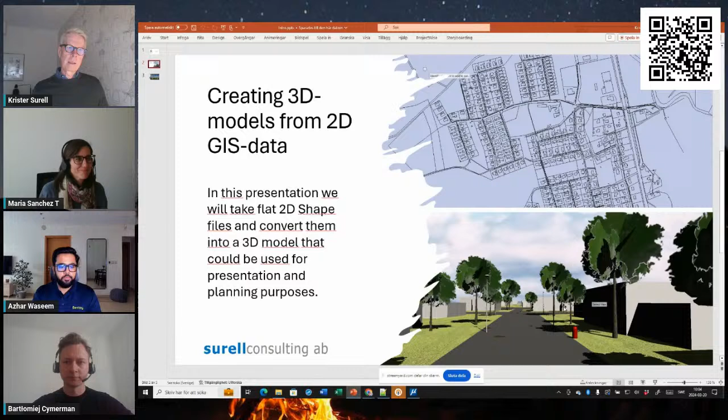So a couple of tricks to bring this flat 2D data into something much more interesting. And if we have a couple of minutes left at the end, we might also try to make it into something like this - from flat 2D data into something that looks really nice and you can use for different kinds of presentations. So let's move over to MicroStation.

So now we're in an empty file in MicroStation, and I'm going to start by bringing in some shape files. So I'll go to the attach tools, which bring in background data, and I will select a number of shape files that will constitute a base map. And these are geolocated, so I will reproject them to the current coordinate system in the file that I'm working in.

And if we just have a short look, we can see that you could actually bring in data in many other different formats as well, MapInfo for GIS or different 3D formats, SketchUp, 3D Studio, and so on.

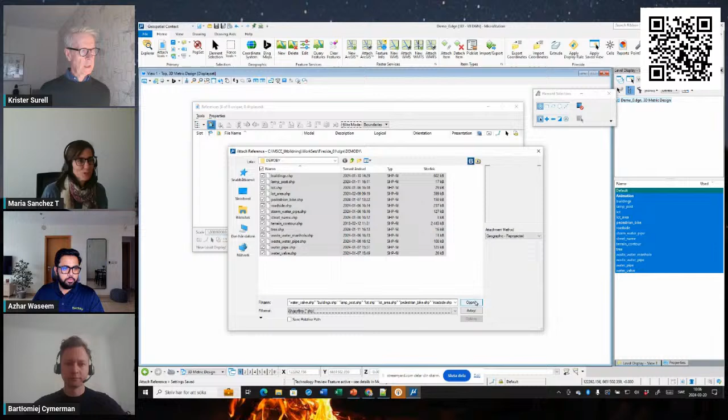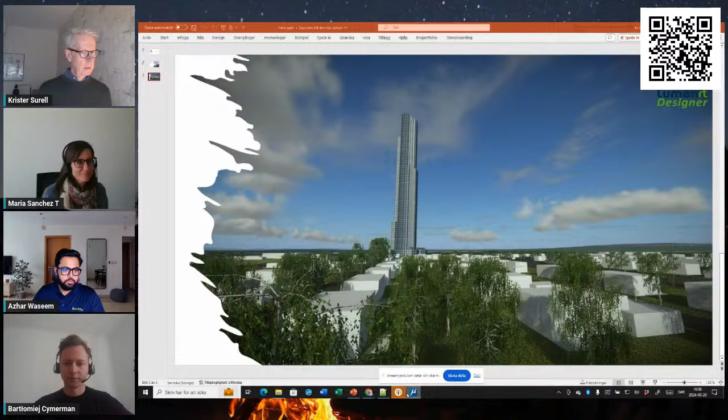But we will be working with shapefile for this. MicroStation supports more than 70 different formats, so yeah, it's great. So we bring in all the files. Since this is a live presentation, it takes a couple of seconds.

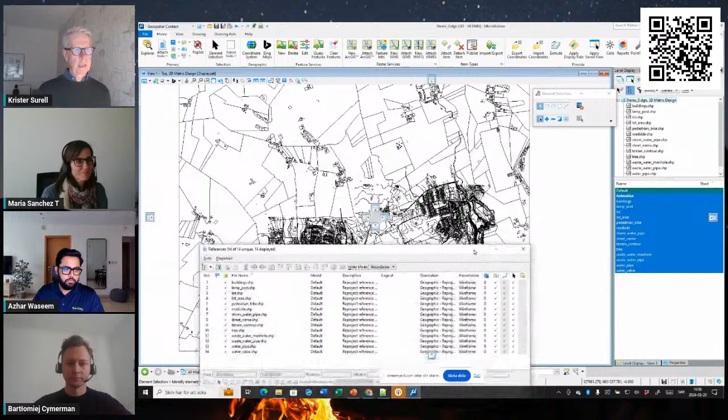So now we're here, and we brought in all the data into MicroStation. I will actually merge this into the current file because it will be a bit quicker when we do the presentation. Otherwise, we could have had them as references, and maybe the data would update and we'd see the actual live updates. But now we merge them into the file, so for this presentation, everything will be in the current file.

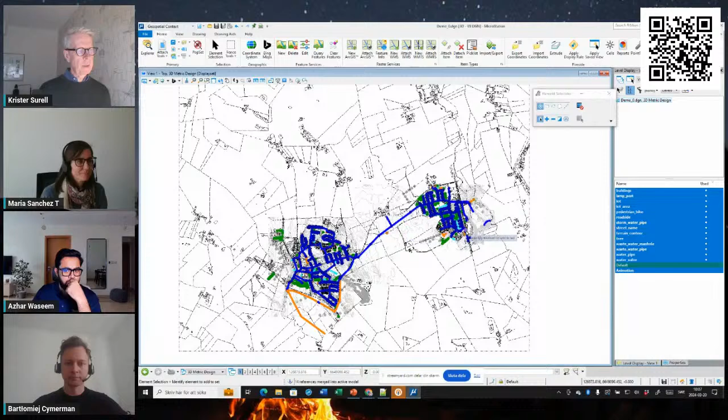Okay, so the data is now in the file. This is GIS data, so the data has attributes attached to them. If we zoom in and select the building, for example, that building will have data. This is Swedish data, so you won't be understanding so much, but anyway, you can see that it's actually attributes, and on the pipes, water pipes, there are also dimensions and materials and that kind of stuff attached.

I also said that this was geolocated, so let's see where we are. I will turn on an aerial Bing map in the background so we could actually see where we are, and we could see the building.

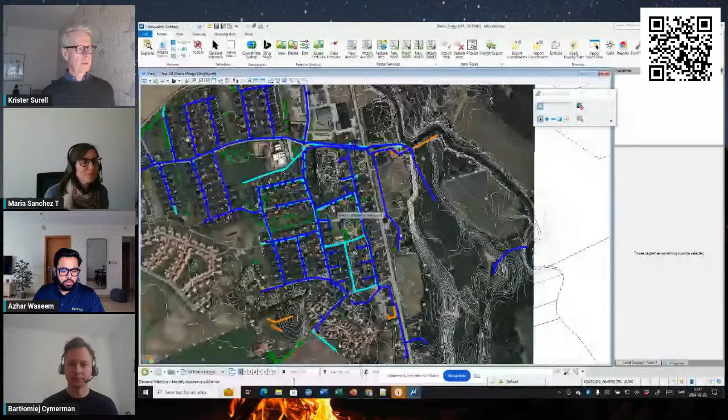This is also important about MicroStation 2023, that it has direct access to Bing maps and also to the Esri server, so with the GIS information.

So this is Sweden. Stockholm is around here, and we're a bit north of Stockholm for this purpose. So I will turn off the background map now that we know where we are.

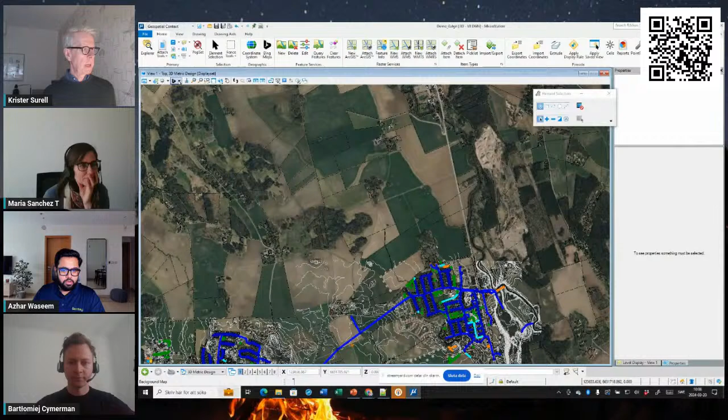And as you said, bringing files like we did here is one way to bring in data into MicroStation, but you could also bring in data from the web, from different Esri sources, raster sources, or vector data like feature services. I was trying to find a good data set to bring in here, but there wasn't very much because this is a very small city.

But there were actually some weather stations, so I could bring in web feature service data over weather stations. So I connect to a web server, and it responds and says what kind of data it has over this area, and those are active weather stations.

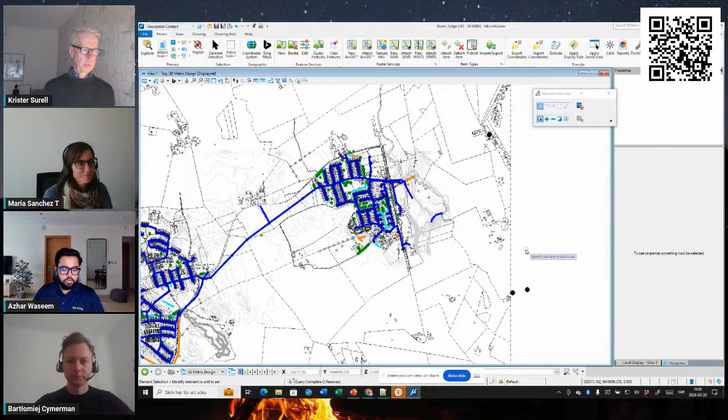So I could connect to this, and I could query, and it will read data over this area, the area we see in this view right now. So if I say query, you see it popped up a couple of sites here, and this could be shapes or lines or whatever. This was just an example of point data that we could bring in from other sources.

So right now we see this data in the way that I configured the layers to be, if we look at the colors and so on.

But another great thing about MicroStation is that you could choose how to display your data using the attributes of your elements. So I can re-symbolize this in many different ways for presentations and analyzing, using something called display rules. So right here we have something called display rules.

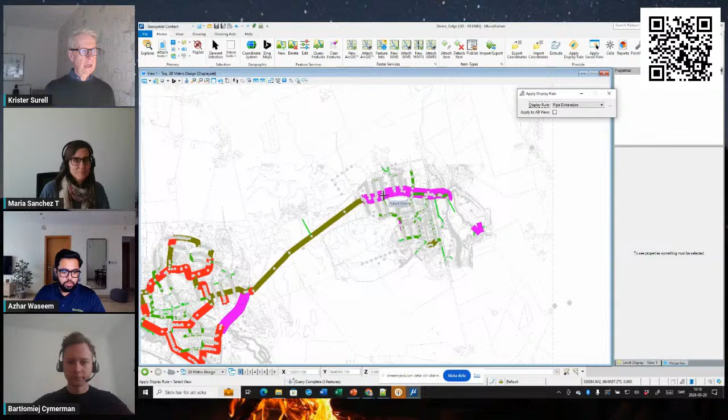And if we want to look at this data and focus on the pipe dimensions, where do we have the bigger pipes, the smaller pipes, I could just change to another display rule. And now we see where we have the main pipes coming into this area, and then smaller pipes, and the smallest pipes going into the parcels and buildings.

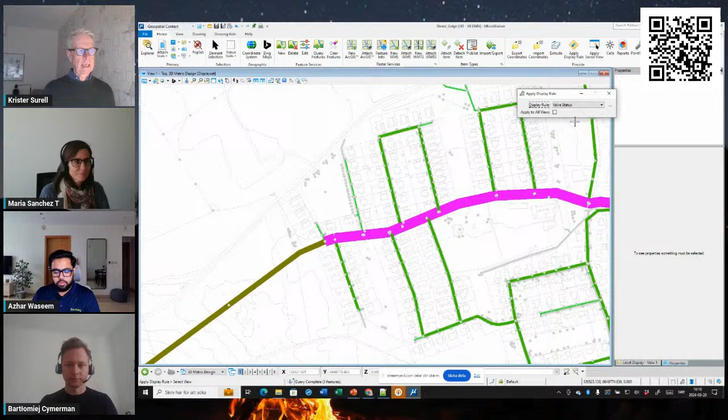Or we could look at anything else, like valve status - the water valves could be either on or off. And right now nothing happens, so I don't know why.

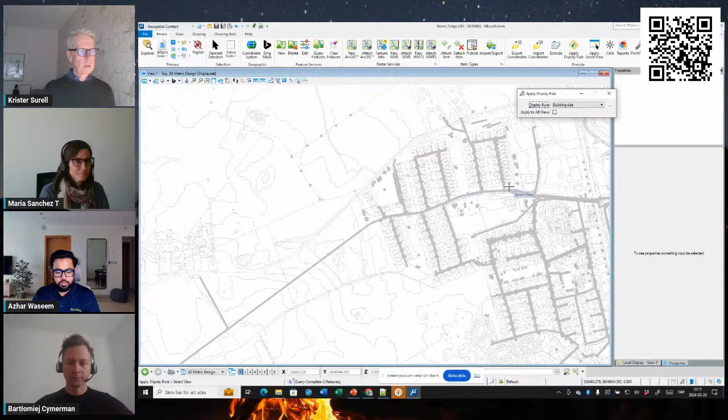We go over to the building size instead. So we could re-symbolize this and use the attributes connected to the data to see where we have buildings of different sizes, but it could be anything. So display rules are a really good tool to present your data for different purposes.

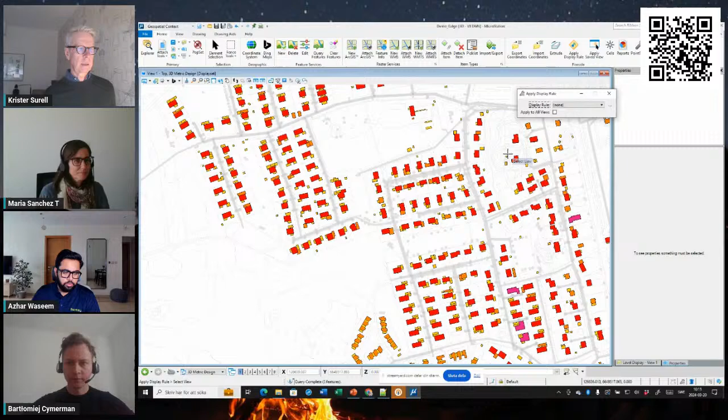So I'll go back to none and just look at the data the way the layers are defined. And just the fact that we have attributes connected to data opens up different kinds of possibilities.

We could report on them. We could also search. So I could open up a tool called Explorer, which consolidates all the information in the file in one place. So I could, perhaps I want to search for a building of a certain ID or something. I could add the buildings and the building IDs, and we could search for...

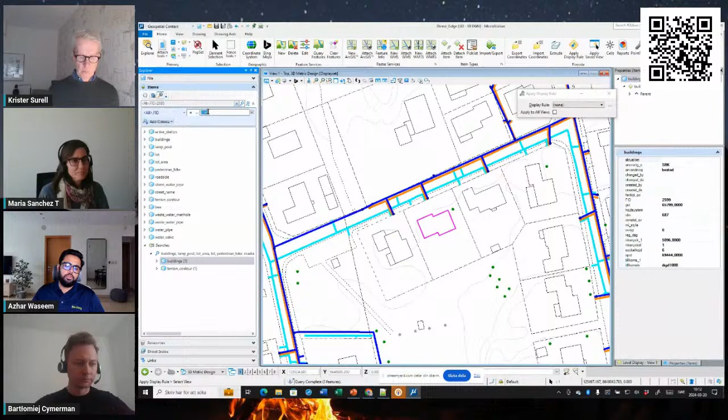Some ID and it will find buildings. And if I turn on the zoom tool, it will also immediately zoom to that building. So we can query also in the GIS information. Yeah, absolutely. So this uses all the information that was brought in from the GIS files.

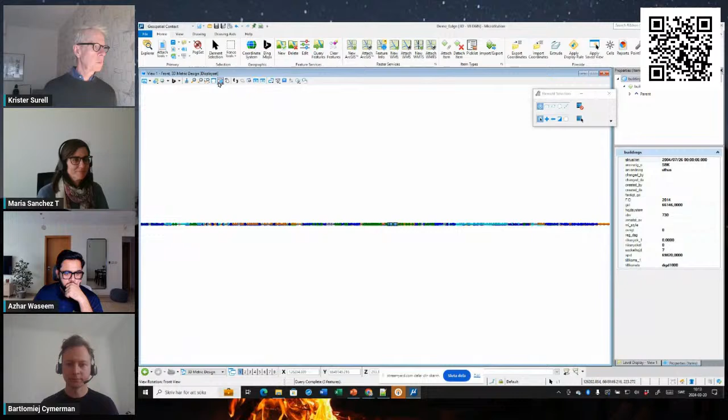Okay, but the purpose of this presentation was actually to bring this 2D data up to a 3D file or 3D model that we could use for other purposes, because this data is actually flat. So if I look at it from the front, it's super flat. That's the way the shape files are made. So we go back to top.

So what I want to do is start by replacing the point data with 3D cells. Cells are predefined symbols that you could use to create your map. Those could be 2D or 3D. In this case, we're in a 3D file, so we could use 3D cells for trees, for manholes, for lamp posts, or different kinds of data. And the point data in this file are actually trees, lamp posts, manholes, and wells.

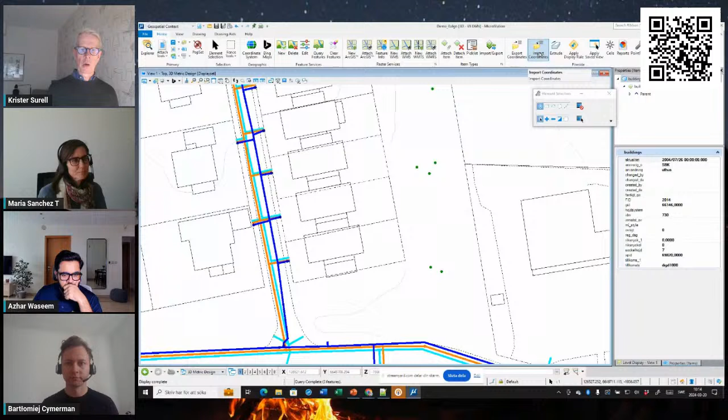So if we start with the trees, we could do it in different ways in MicroStation. We could export this point data to a text file and then import them again, and during import, we could replace those points with 3D cells. But an even faster way is, in this case, I'm going to use an open source tool that you can download from the web. It's a VBA tool. VBA is also built into MicroStation, so you can create your own tools or automate different workflows.

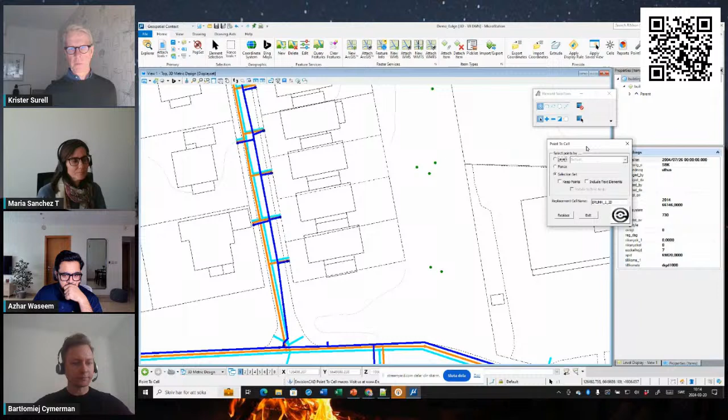So I will just select all the elements on the tree level and replace them with a tree cell. So select everything on the tree level, replace those points with a 3D cell. So something happened.

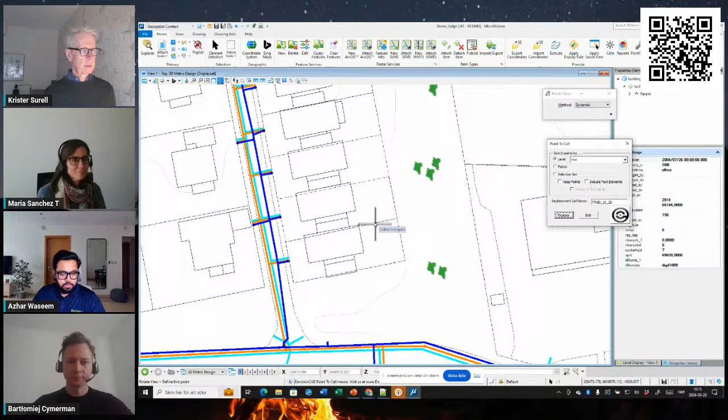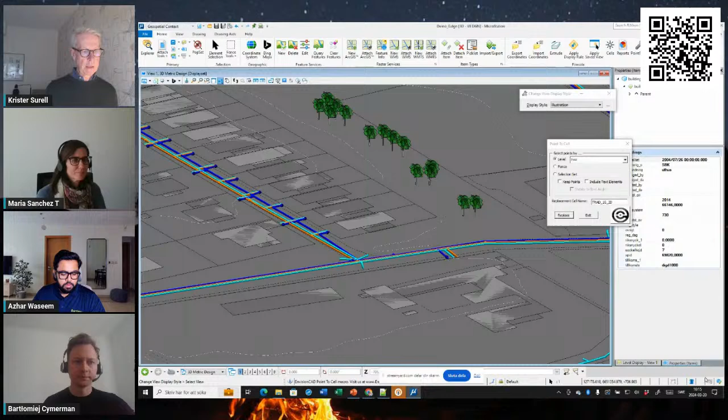We could just rotate this view to see that now we actually have tree data here. And I could move over to a more shaded view as well, because this is a wireframe. We could use illustration. So, okay, first step done. We now created some 3D trees. I will turn off the ground level here.

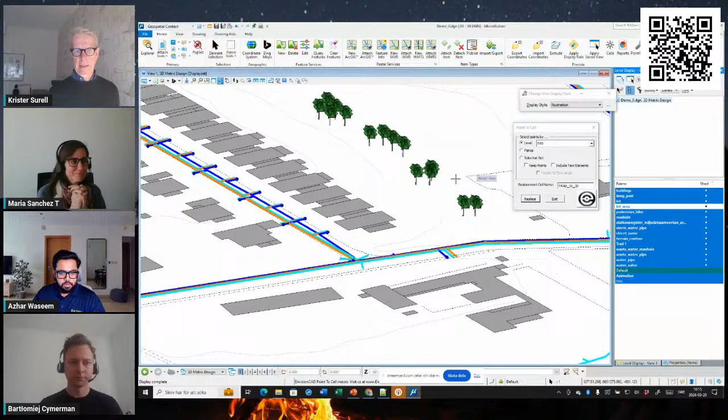So we could do the same thing now for the lamp post, for example, and the manholes and the wells. But instead of you looking at me replacing all this kind of data, I will just move over to a file where I already replaced the data to save some time. So we go to this file, remove this one. So it's exactly the same file. Oh, apart from that, I went one step ahead of myself.

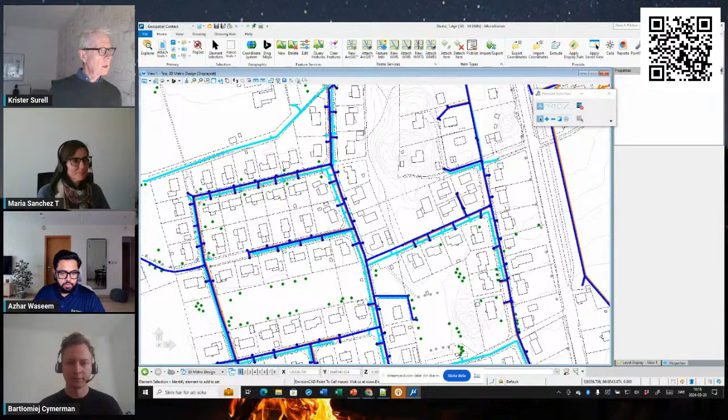Wait, I'm going to replace them in the file. So bear with me for a couple of seconds, and I'll replace the lamp posts.

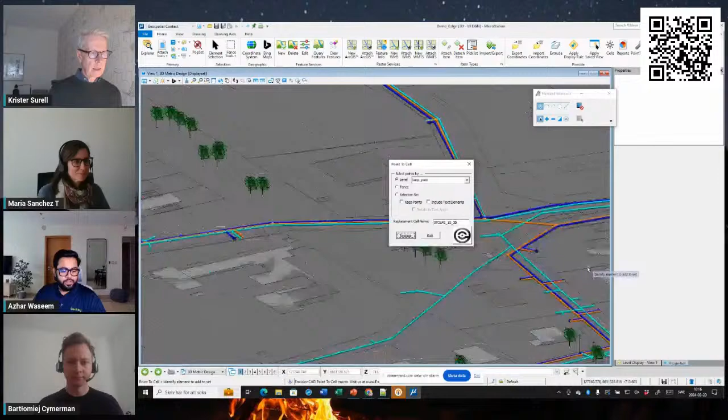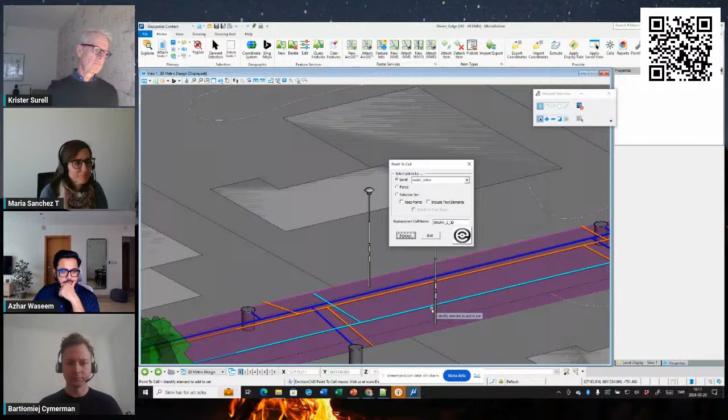So I do that. A bit outside the area here, so somewhere they are. We're going to find, yeah, there. Lamp posts, and we could take the wells as well. I think I'll use those. So now we got the manholes as well, and I think we could settle there.

So okay, now we turned all the point data into 3D data. That's great. The next step is to bring the buildings into 3D buildings as well, and we could do that in different ways. In this case, if we have a look at the buildings and the property data, okay, you don't understand Swedish, just rely that there is no information here on the height of the building. It's just the way it is. So I'm just going to take some general height for the buildings.

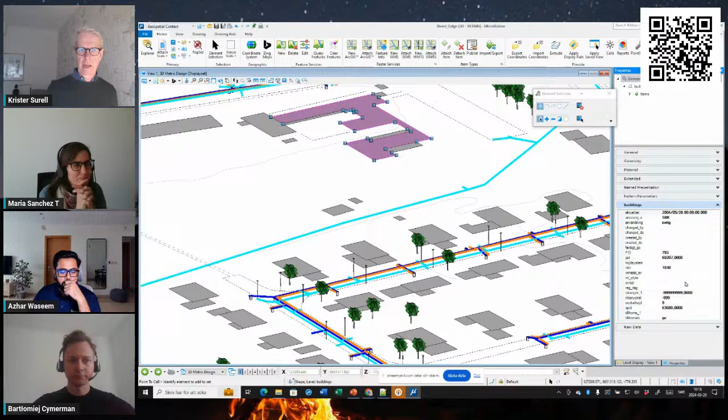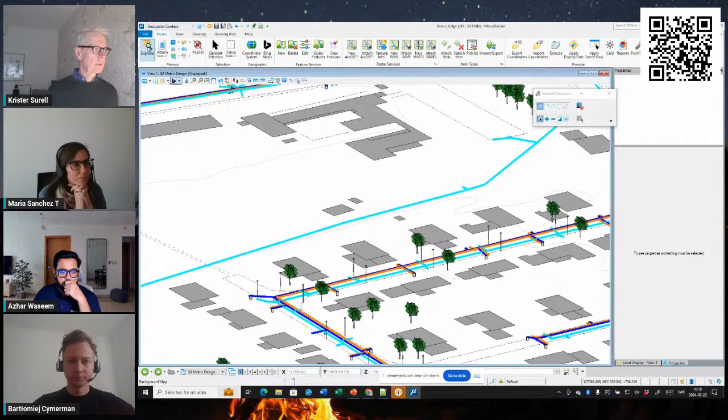And we could, of course, bring up all the buildings to the same height, or we could select buildings of different types. So we could, for example, take residential buildings and put them on one height, and the smaller buildings on a lower height, and official buildings on a bigger height, just to make it a bit more interesting. So I could use this Explorer again to search for residential buildings. And you see something got selected in the view. So now I selected just the residential buildings, and I will extrude them to some height.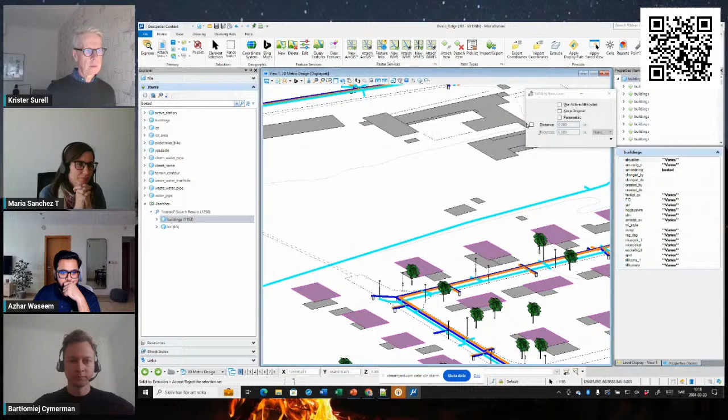So, and like this, now all the residential buildings are up to some height, and we could take some of the smaller ones as well and go for a slightly lower height on those.

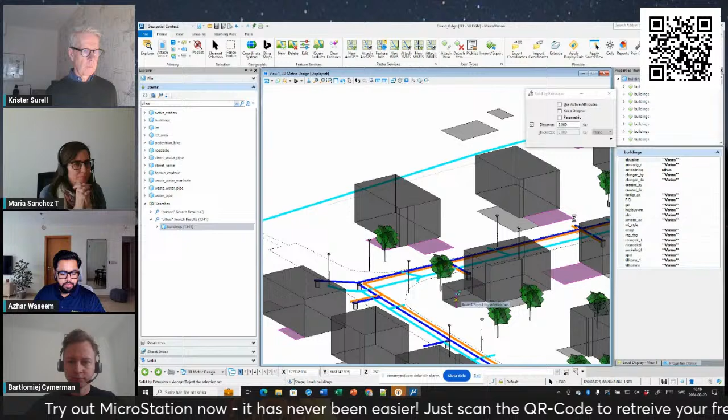So, I'll turn this over to illustration again. I think this layer has some transparency on it.

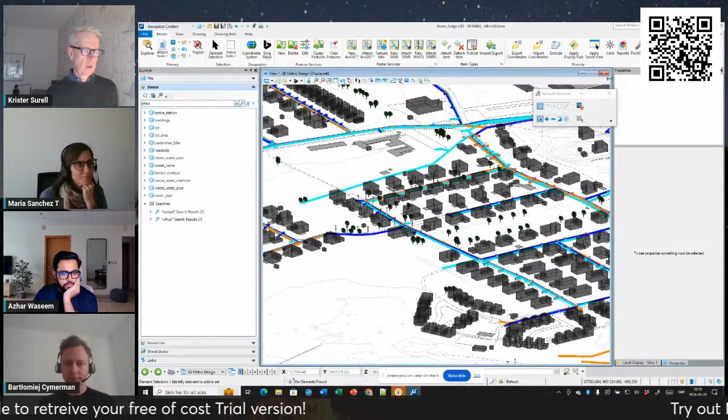Better. I had a display style that changed the appearance of the buildings a bit. But now we actually have something much more interesting, and we could use this for a presentation.

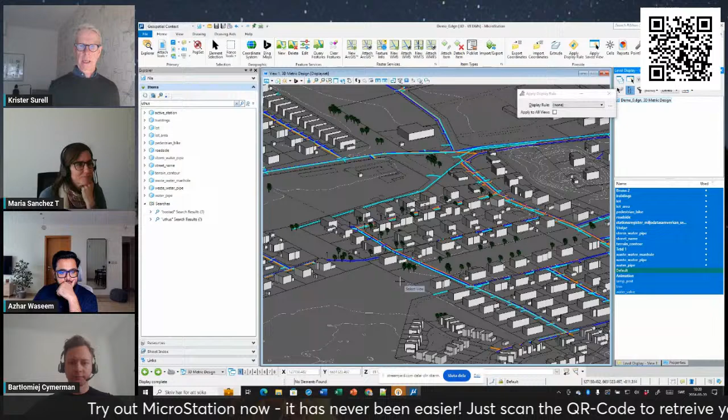You're planning to build something new here, and this gives you context for what you're going to do. Perhaps you want to build a giant skyscraper in the middle here, and you want to put that in context.

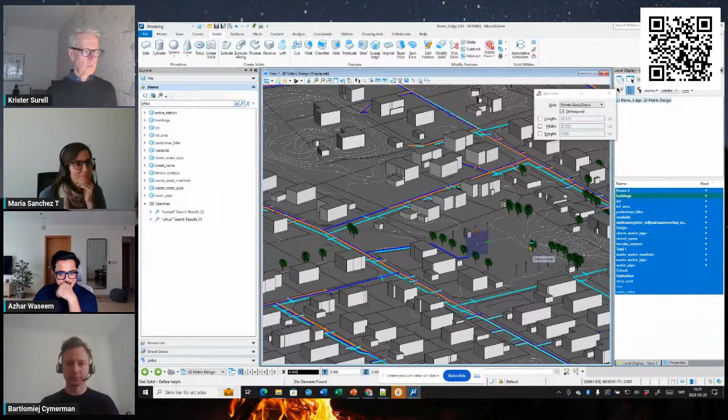My command line ended up just behind there, so I'll move over here instead. I'll just draw something big in the middle here. So now we're going to build a super high skyscraper here.

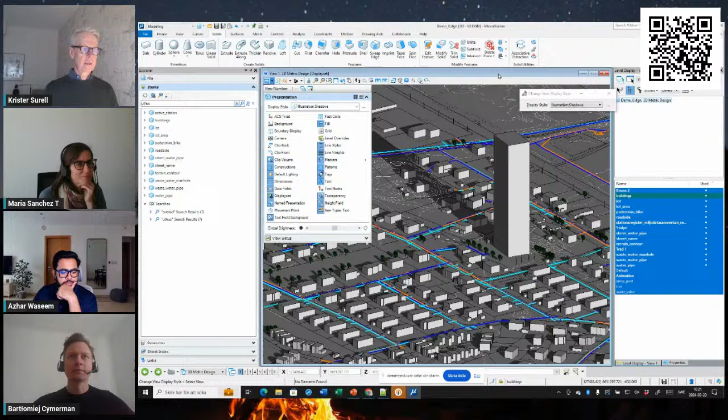How will this affect the surroundings? We could change the display style to illustration shadows, and then see how the shadows affect the surroundings. We could also go to the visualization tab and change the time of day.

And it always ends up on some of the screens. So here we are. And here we have the time of day. This should... okay, it doesn't. Who knows why?

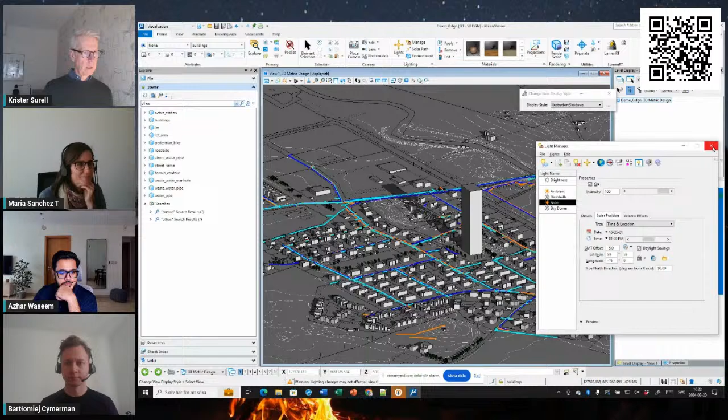That's the purpose of doing live demonstrations. Anyway, we settled with one time of day, and the people living in this direction won't be too happy if they build this big one here.

But you could use this, and you can actually record solar studies in MicroStation. You could record a little movie and see how the shadows will fall during the day, which is a great way to see how new buildings will affect the surroundings.

Now that we are in the visualization workflow, it's also possible to make this even more interesting by assigning different materials to the ground, the house, and the trees.

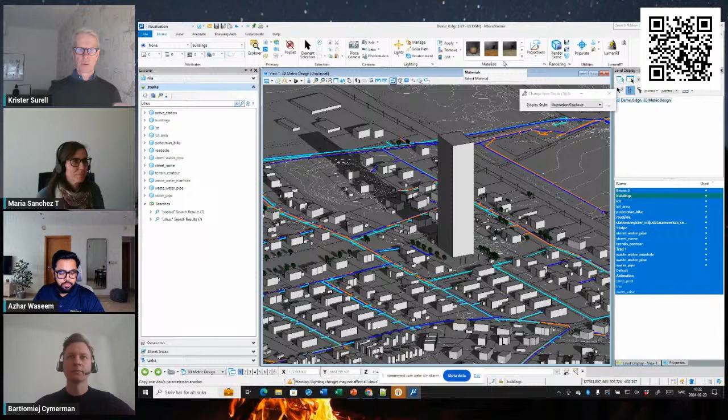So we could move over to a file where I put some materials on the trees and on the ground. This is still the same file—we haven't done any modeling. We just replaced some points with 3D cells and raised the buildings.

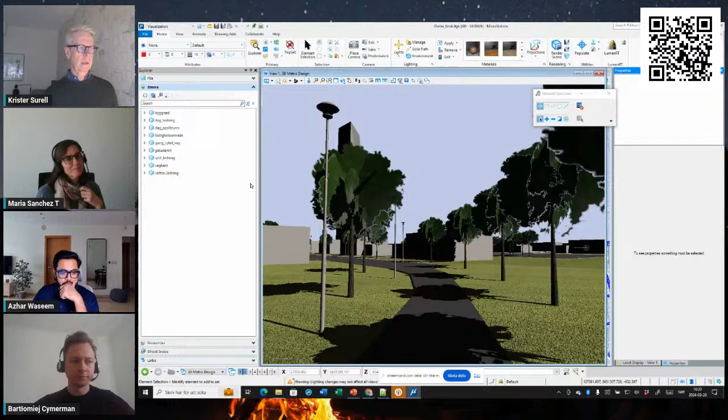Now we have a file that could be used, and there we actually have the big, super skyscraper—much more interesting to show. You could also see that we have the pipes underground, so I just lowered those half a meter or so.

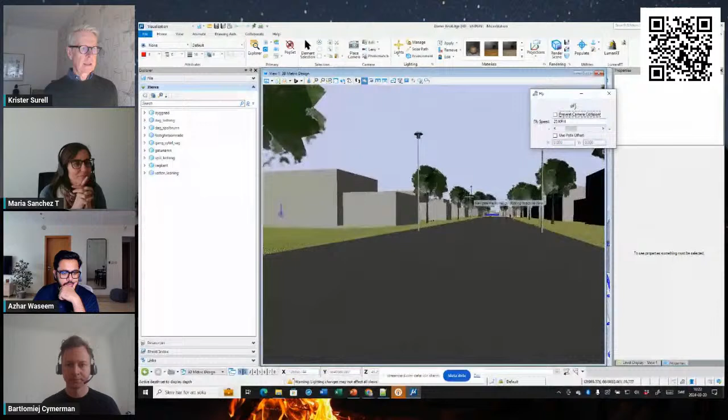This is something you could really use if you want to present an idea. We could also turn on some background data, so we have it like this.

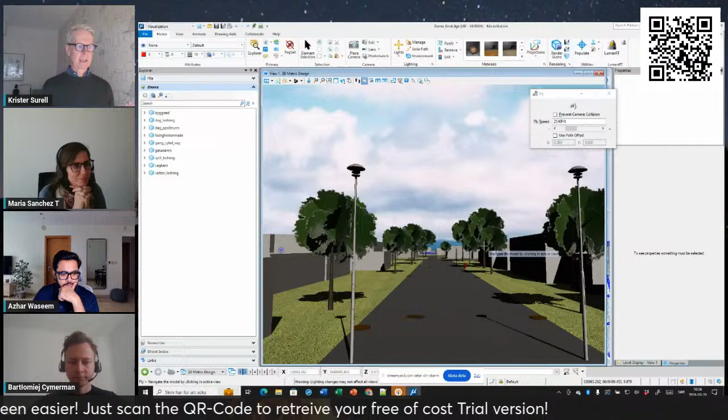As I told you in the beginning, we could take this even a step further. Right now we replaced them with cells that are quite schematic, but there are tree cells delivered with MicroStation that are much more realistic.

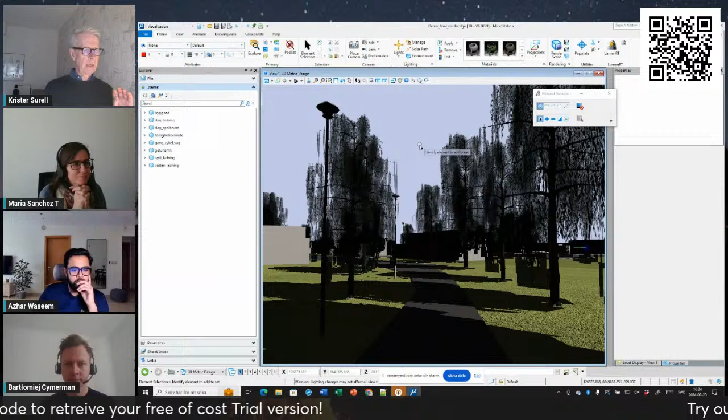So if we do this instead, I replace them with some other trees. They look kind of okay here, but the reason I used those cells is that they're compatible with other software delivered with MicroStation, which is great for doing visualizations—it's called LumenRT.

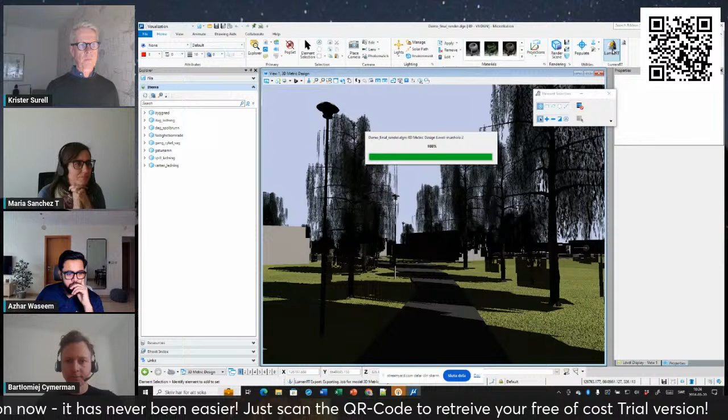So I could start that software from within MicroStation, and it will take this file I'm in right now and open up LumenRT. It will take a couple of minutes because the computer is as old as I am.

But also, being live, it takes some time. It's a lot of trees, and these tree cells are optimized to work within LumenRT.

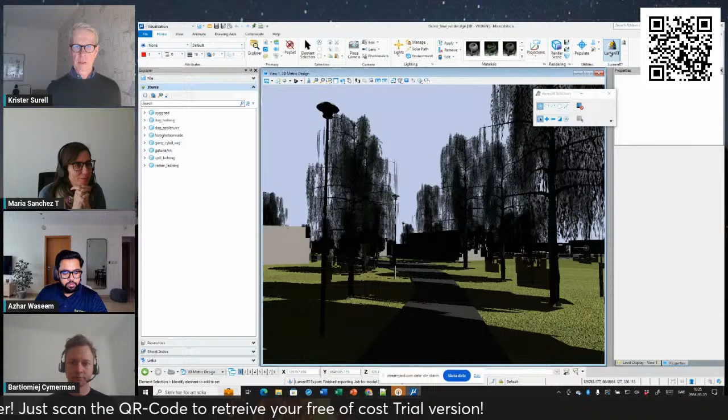LumenRT is a much easier way to do visualization and presentations, and you can change the time of day or the time of year, and add more content to the files, like people, so it's a great tool if you want to bring that data a step further.

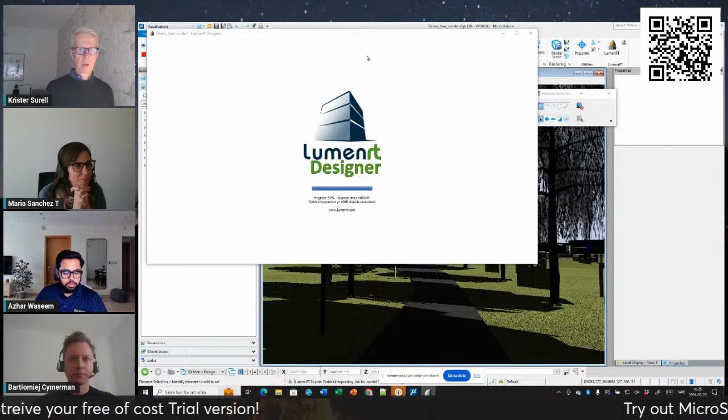And still, we haven't done any modeling. We just went from the 2D data, replaced some cells, extruded the houses, and that's it. So it's very easy, and I did it as we ran the demo.

Okay, come on. It always happens, yes.

But any day now. And it takes twice as long when you do the presentation.

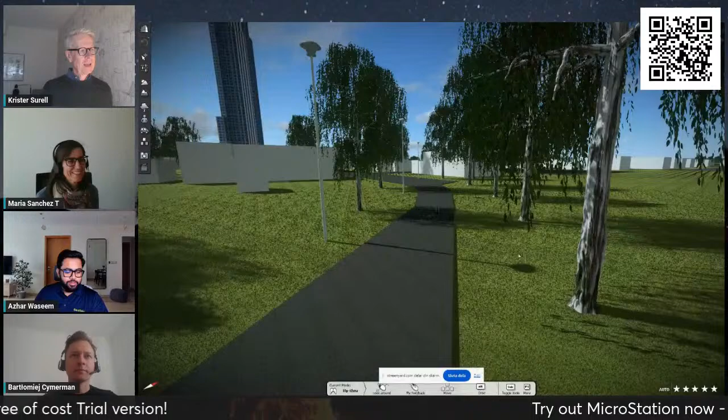Okay, here we are. Good. So this, of course, looks much nicer, and I could have an overview of this area. There are also a lot of materials and information you have in LumenRT that could enhance your file even more. So I placed a couple of cars here, and this is super great because you could also, as I told you, change the time of day very easily. It looks amazing. Yes, it's like running a game or something where you could just work.

And so it's still those GIS 2D shapes that we just brought up and made some buildings of, and those trees are just the points that we brought in, and we also have the wells and manholes and everything else in the file. So I think MicroStation is a super great tool to bring in different kinds of data that you need, because in all bigger projects there are files in different formats that you have to bring in. You just don't have design files. You have to deal with a lot of other file formats as well. And this is just a small demonstration on what you could actually do.